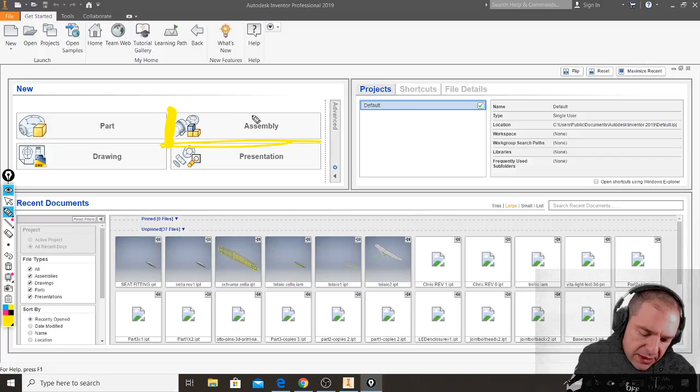So what we have to do here is this: today we need to start talking about assemblies. There's this part of Inventor. Sorry if sometimes it looks like I'm stuck - that's because down here I have my phone with the screen showing your chat, so when I look down, it's because I'm reading your messages. I'm not falling asleep. So what I was saying is this: today we need to talk about assemblies and what it means.

Assembly is very simple. When we need to create a design object that is made by mounting together different pieces, in Inventor, to make a realistic simulation, instead of making the object as one single block, one single part, we need to really create all the different pieces, and make each a different piece that at the end is combined into a final object.

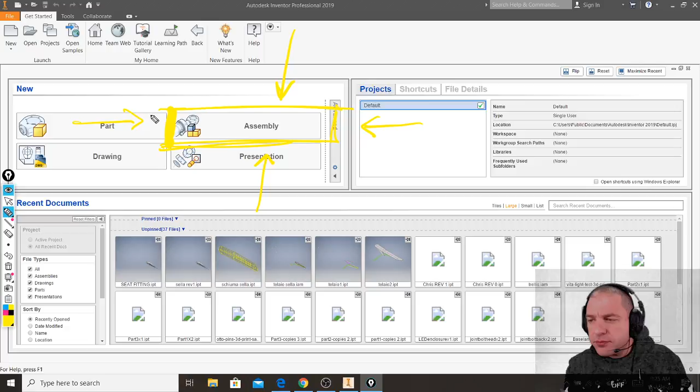In order to make a to-do list - let me see, I have this software here, this board... let's delete this, make a new one. Perfect. This is our to-do list: we need today to make three, I'll say, small Inventor parts.

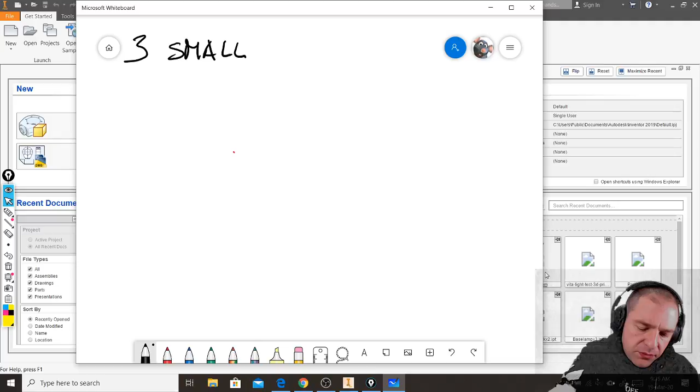An assembly is basically a container where we can put our parts inside, and then we can check if these parts are matching each other. So we need to start understanding how our parts have to work together and what relationship they have.

Just to let you understand which files I'm going to create, I will make a very simple sketch so we can understand what we are going to see in Inventor. I will make three very simple parts at the beginning. Let me make just one starting simple box.

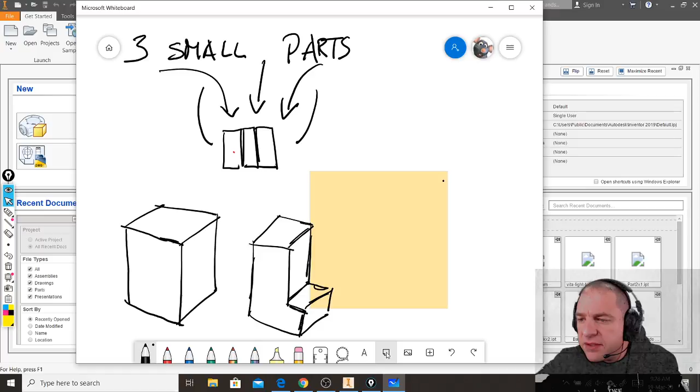Then I will make something that is slightly more complex, that will be this object here. And last but not least—let me delete that yellow thing, don't ask me why it's there—then I will make a third small block. Let me see if I can make a new one. Let's delete this.

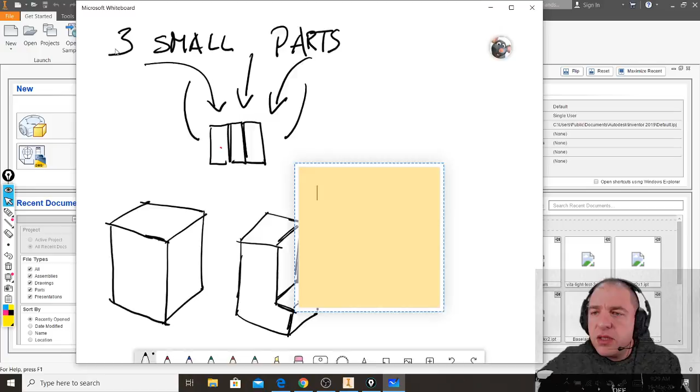Okay, so I was saying this: we will make one box to start, then we will make an L-shaped object like this, and then I will make a smaller box.

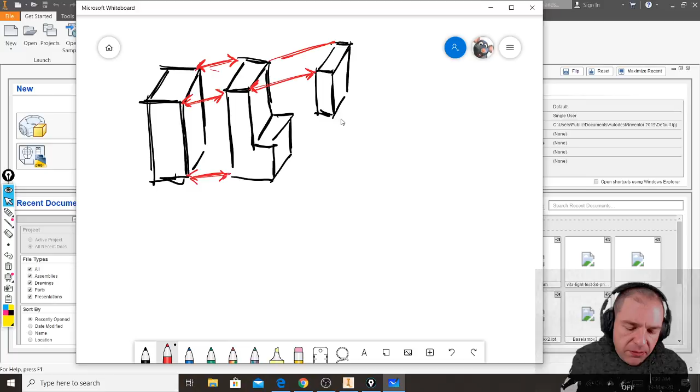This is why: simply because the final result I want to obtain must be something where these parts will be snapped together, and the relationship with my last object is that it must precisely be snapped here. So at the end I will have my object number 1 perfectly attached to my object number 2, perfectly attached to my object number 3. This is how my final Inventor assembly should look.

In order to make this happen, I need to create this, this, and this object as different Inventor files. I will basically have to create 3 parts that I will simply call part number 1, part number 2, and part number 3. I will save these as 3 independent files.

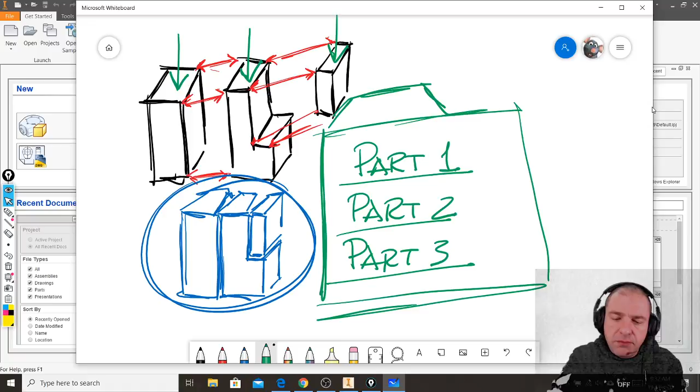Also, especially if you are starting Inventor and have never used it before, when you start making different projects it will be a lot better to create independent folders for each project. So I will make a folder, let's call it School folder. Inside this School folder I will find all these parts. When I make another project, I will make another folder and separate the parts into independent folders. Later on I will explain why this is so important.

But first thing first, let's start by creating our parts in Inventor. So I start by clicking New Part, and as I said at the beginning, this will be that part that is just a regular but slightly big box.

I need from now to start using Inventor with a bit more precision, by knowing dimensions, by adding parameters, not just by drawing free things without dimensioning. So let's start by making the first box. I make, for example, from the top, that is XZ, a new sketch, and I start by drawing a rectangle.

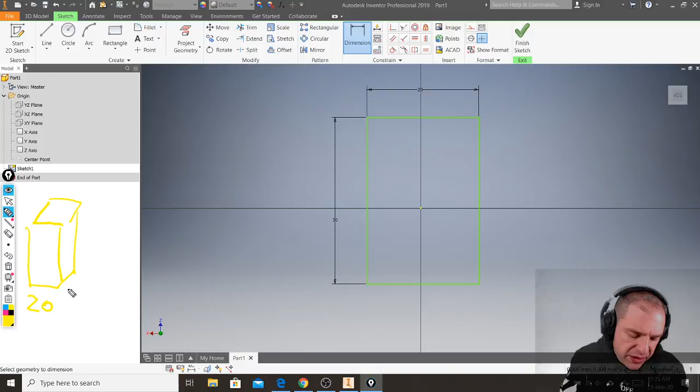Once I make my rectangle, I will start adding precise dimensions. This is extremely important because when I make parts I need to have an idea of what I'm doing, so I need to write a few notes and remember dimensions so my pieces will be matching parts. Let's say I add my first dimension to the rectangle, from here to here, then click there. Let's start with simple numbers we can remember: this will be 20 millimeters. Then I add a second dimension: let's say 30 millimeters. So my first box is this one, 20 millimeters by 30 millimeters.

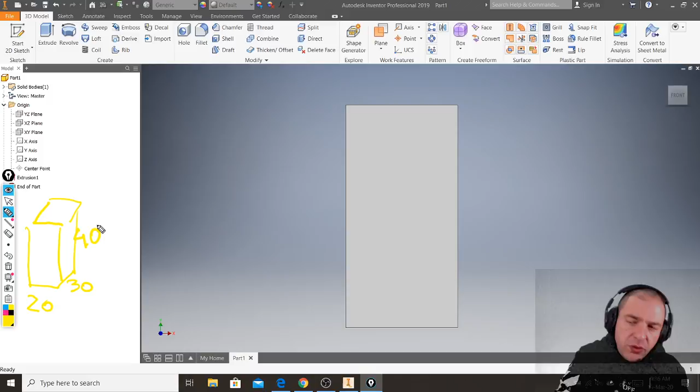Then I click Finish Sketch. With this sketch I will use Extrude to make it three-dimensional, and using simple numbers I will use as a height 40. So my first box will be 20 by 30, and the height will be 40—pretty easy to remember.

Till here, nothing new, but let's start viewing how to save this file so it will be easier to reuse. I click Save—but when I click Save, Inventor always uses the latest folder I've used to save my file. What I will do instead is go to the desktop and click this symbol here to make a new folder.

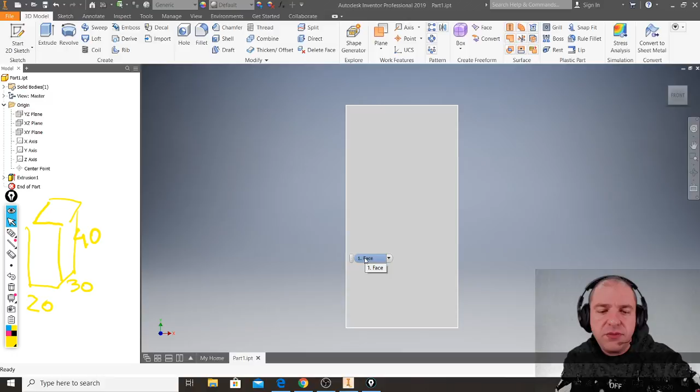Once I've done this, I will call this new folder School, as I said. I'll double click inside—oops, screen is gone, it's back, don't worry. As I was saying, I save this as Part 1, just to remember this is my first file, and this is number 1. And I get this.

Okay. Once I've made these, I will close part number 1 and make a new part. I'm using these pieces of paper simply because I don't have a whiteboard, but I'm sketching this simple diagram so I remember easily which dimensions to use for my next part.

My next part must be the L-shaped element that I mentioned. I'll start this time, since it's easier to make, by drawing the L shape that I will extrude. And you'll see something I do on purpose: instead of drawing the L directly on a vertical plane, which might look more logical, I'll draw all my parts starting from the top plane, just to show you how interesting the assembly process is in Inventor.

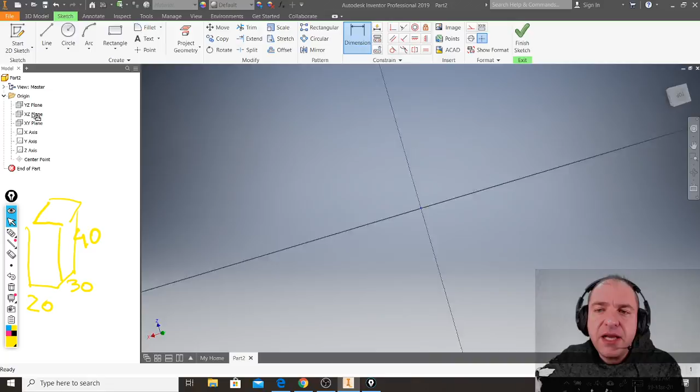So again, I select the top plane and draw an L-shaped object. I start without any dimensions at first. When I draw, I try to pay attention and make my lines straight, so when I see the perpendicular and parallel symbols, that means I'm fine.

Then I will start adding dimensions. This distance, between the top and lower edge, must match the height of my part number 1. So this will be 40.

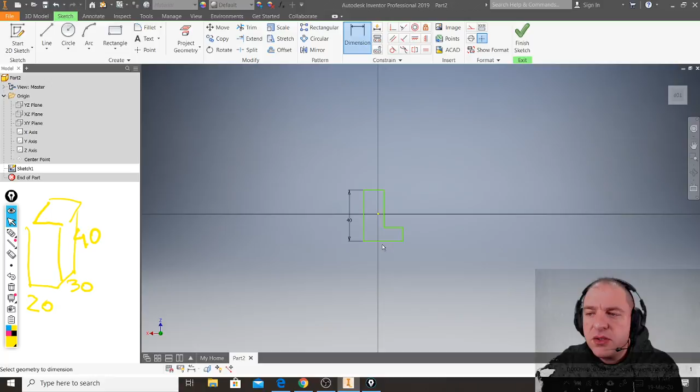All other dimensions can be whatever. I'll use simple numbers to avoid dealing with complex values. So I'll make this 20, and this distance 20 as well. I need to fix this distance - let's say 10. And then I need this one... exactly. No, that's not needed because I already have this.

So this is fine, and what I'll do is write these dimensions here just to remember. I change the color and start by drawing this L shape: this is 40, down here is 30, this is 20, this is 10, this is 20 - so this will be 20. And we have our phenomenal sketch.

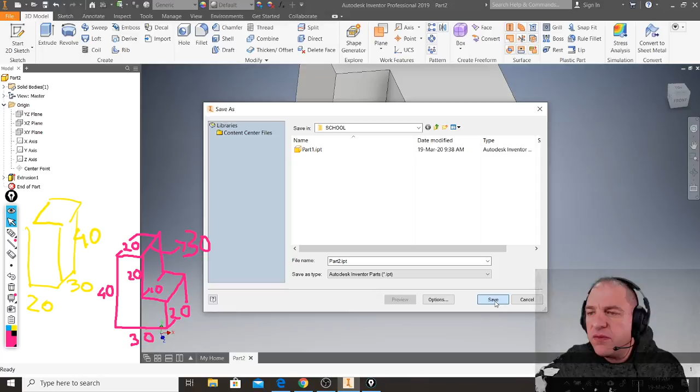I've almost done. I need to make my third part. I'll just remind you that I have to make a smaller box that has to fit this gap. So this box must be 10 by 30 as depth, and 20 as height. I close this and make a new part.

I will start from the top, sorry. Again, I start by making a simple sketch. So I make a rectangle, and I'll give this rectangle 10 and 30 as dimensions, and then extrude it 20 millimeters up.

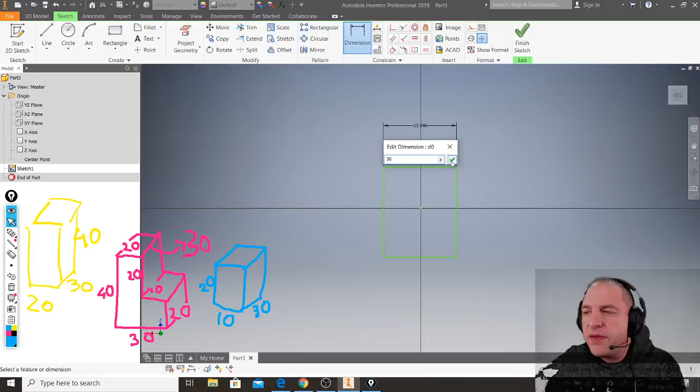So I will give this dimension, and look, I'm doing something slightly wrong on purpose, but still using correct dimensions. I make this 30, then I make this dimension 10, so that in floor plan it matches the dimensions I need. Then I extrude it 20 millimeters.

And this is my last phenomenal piece. I click Save, and I will call it Part 3.

Then, as your project becomes a lot more complex, it will be a lot better to give your files more precise names, like with the functions they have, the orientation - left, right, top, bottom, cover, lid, handle. You should give your files names that you can easily and highly recognize.

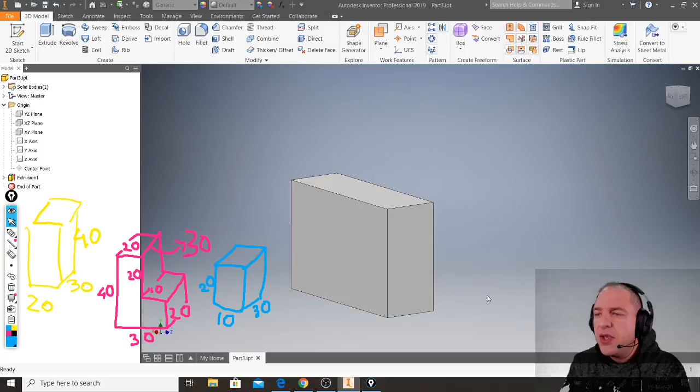So let's close our last file, and let's also delete these sketches that were useful just to understand the dimensions we have to maintain along the process of making our parts. Now we are ready to create our first assembly. And how do we do this?

What we have to do is, I know this will be a little bit shocking, but if we want to create an assembly, we need to make an assembly. Believable. And what is phenomenal here is that now you have just an empty object. You can also see that most of my tools are turned off because right now there is nothing to do.

Simply because when we create an assembly, we need to start by going in this area, and take care, we don't have to immediately click this big button. Don't do it. What we have to do instead is click down here where it says place from the content center, but most important here we can see there is a small triangle, meaning there is another tool we have to use. So I will click down here, and I will use the tool that is simply called Place.

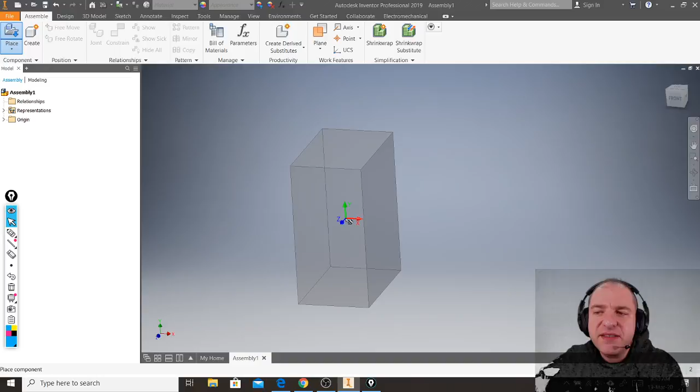And this is exactly what I'm going to do. So I browse the folder called school, where I see these three parts, and I will start by clicking part 1, and I click open. This will be at the beginning a semi-transparent preview, so I just left click and I have placed my first part.

What you see also is that Inventor is giving me the possibility to continue placing part 1, but we will see this later on when we make examples with more parts, so I will show you another interesting example. For now, once we have clicked to place our part 1, we press escape from the keyboard, and we simply repeat the process of placing.

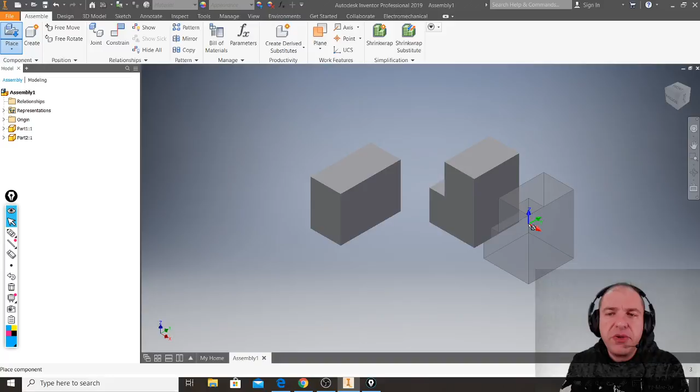As I said before, you can notice that our main button will remain with the option that is place, so we can just click it. We will select part number 2, click open, and place our part inside this area without any precision, without any snap. We just left click it. And that's it, we have nothing else to do. We need one repetition of part number 2 and we press escape.

Last but not least, we repeat this process for part number 3. Select the part, click open, place it, and we just need one repetition of this. We can press escape and we are good to go.

So what we have now, if you see, we have our 3 elements that should be attached together, but basically this is like having 3 construction blocks laid on the table. What we have to do now is like having instructions to follow, and we must combine these pieces together. So what we have to do, as we have sketched, let's see if the sketch is still there. It should be here, exactly. Our sketch must be like this. So this is our final result.

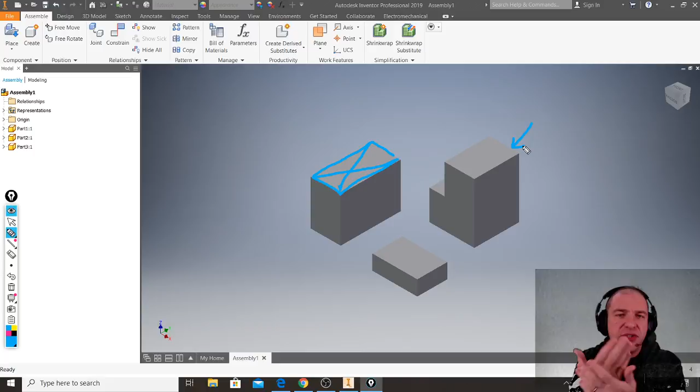So let's understand this. Technically, this face, this one, and this face, the one on this side, they need to perfectly match. They need to be aligned.

Then we need to make other adjustments. So when our piece will be mounted, this top face should instead be aligned with this top face. And last but not least, this face of this object must match that face of my part number one.

So these are rules that I need to check if they work, and if they work, my pieces will perfectly snap together. But how can I check if this is true, and how can I apply constraint rules to my parts made in Inventor? This is exactly what you have to do in the assembly. And in the assembly, this tool here, which I will highlight even more, called Constraint, is the one that allows you to start creating matches between all of your single parts. This is what we are going to do now, immediately. That is this.

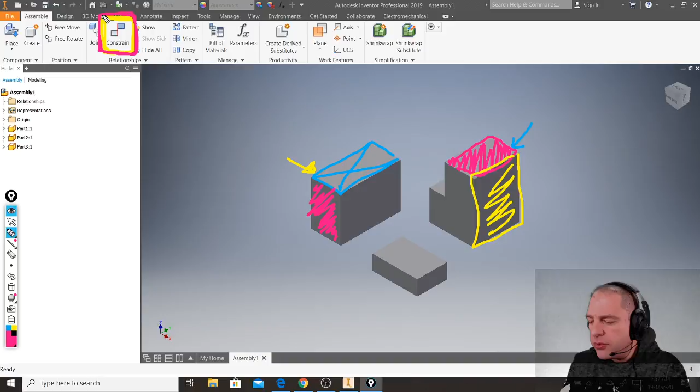Look, I click Constraint, and this is the dialog box that appears when I click Constraint. What I have to see is that into Constraint I have, first of all, slightly different ways to create relationships between different parts.

The one that we will use the most will be this method here that is called mate, and this basically allows us to align planes together. And when we use mate in combination with these, we have these two options. We will explore them in a second.

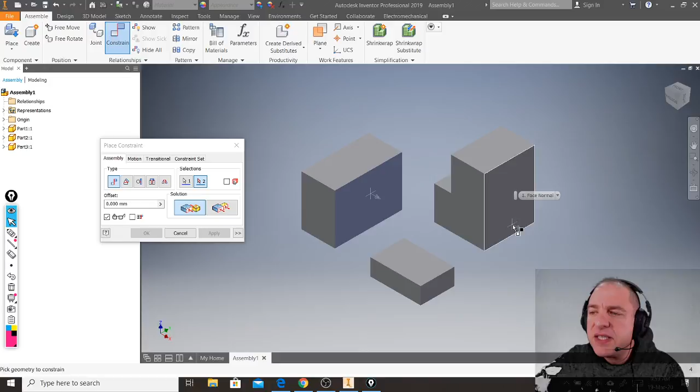How constraint works, because this is very interesting, is basically we click constraint, then we click one starting plane or face of your object. Once we have clicked the first face, we move our mouse and click the second face that is on the opposite, on another object. But we click here, and what Inventor does will be it will match these faces together. So look, if I click my second face here, this is what happens. Poof!

And if you have speakers turned on, when you make these, you also hear a sound like poof. Okay? If we are happy with the result, we click OK.

Let's see what we have created in Inventor, because this will start by being unbelievable. Look, if we try by selecting an object, let's say this box here, and we left click and drag, we can see that we are free to move this box wherever we want. This box has no constraint.

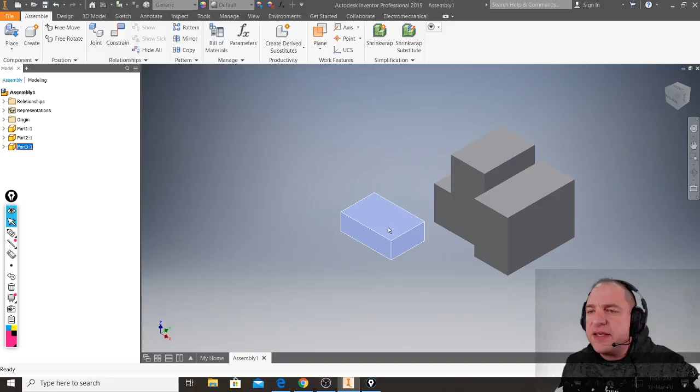We haven't yet matched this box with any of our parts, so if I move it, it goes wherever we want. But now check this instead. We have created our first relationship. We have said to Inventor that this face of this box must match this face of this L-shaped object. So now, if I left click and select this box, it looks like I can move it wherever I want, and I can do the same here.

But it is not 100% free movement, because if you rotate your point of view, you will see that no matter where I try to move these pieces, my planes are always matching, because I have created one matching constraint.

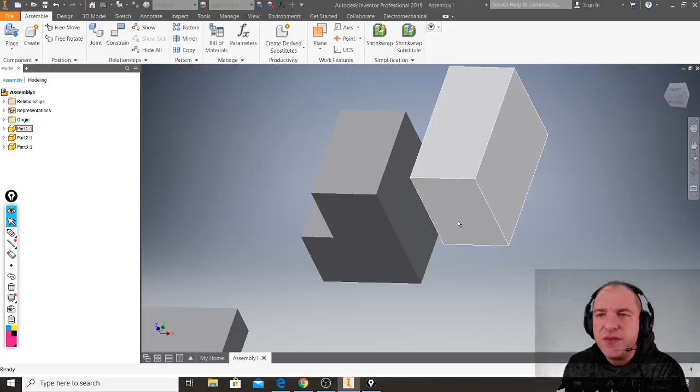What I need to do now is match the top face of this L-shaped object with the top face, that should be this one now looking forward, of this box. So where is the difference, and why? I showed you before that we need to understand these 2 options here, this one and this one.

Simply because when I made the connection between these 2 faces, look, one face was looking like that, second face was looking like this, so they were opposite facing faces. And if I want to match opposite facing faces, I need to use this option here.

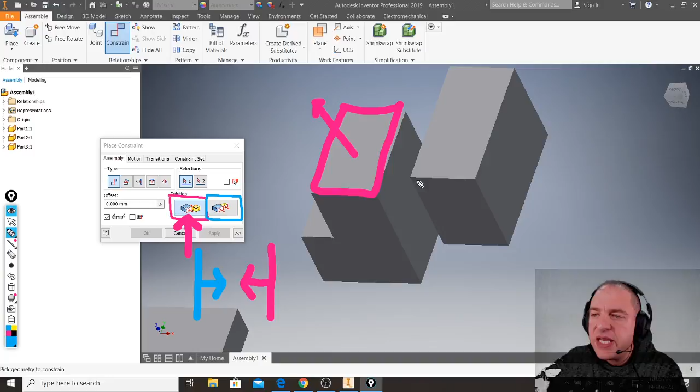Now, because I want instead this face that is facing up and this face that is oriented forward, I want both faces to be matching, but I want them to remain like that - both looking at the same direction. So in this case, I have not to use this option here, that is called mate, but the one that is called flush. So I need both faces to have the same level.

So I will first click flush. Now I can click this face and this face. I left click. Boom! And now they are perfectly matching, looking at the same exact direction. And I can click OK.

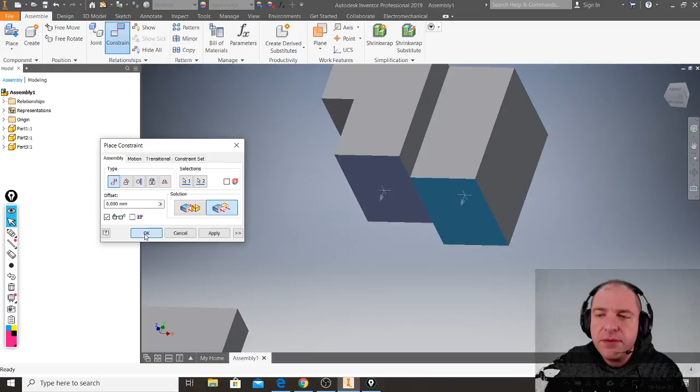And if you check, now if you try to move one of these objects, this is what happens. Look, I can slide this box only along this direction, as well as this L-shaped object. But if I try to drag these objects left or right, because they are sticked together with constraints that I have created before, now one object drags the other one.

Okay? You can still see that I have one last degree of freedom. That is, these objects can simply slide up and down.

And I will fix these, so I will check if everything works properly by creating a third and last constraint in between these two elements.

And what I will do will be simply: I select constraint. Take care, I want this top face and this top face to be oriented on the same direction, so they must be flush, not opposite. So I click first that I want the relationship to be flush, and I click this second option here. Then I click first and second plane.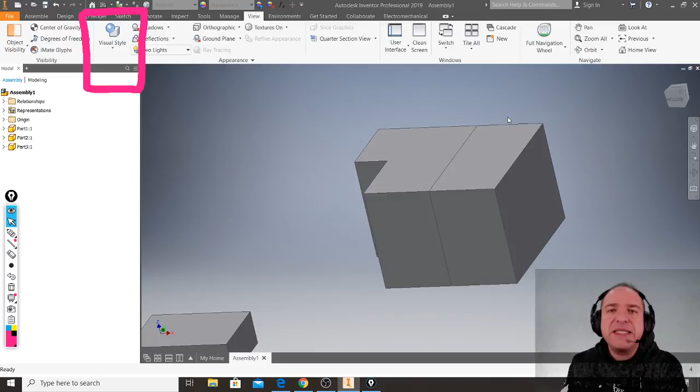This is not only because I suggest, but simply because when we create relationships, so if I go back to Assemble and I go to Constraint, we will see the more we make complex parts that we are not limited in creating matching relationships between planes, but we can create also relationships between edges, circles, certain loops, and so on and so on. So understanding better how your geometry is created will help you also in creating your final assembly.

But now, just to repeat another time these concepts, now we need to check if our last block will match this space in here. So I have to make other 3 constraints.

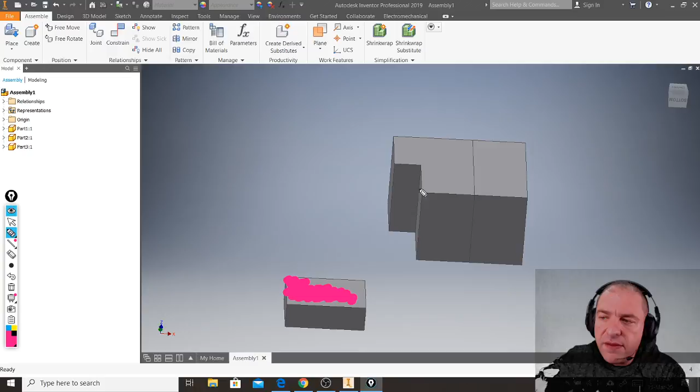So I will start by understanding this. I want this face and this face. This face is looking like this. This face is oriented like that. So I don't want them to be flush. I want them to be mate. So I want them to match.

So I have to click Constraint. Mate is always selected by default as a matching option, so I'm sure that is there. I click this, I click that, boom! And first object that I click is the one that is moved. Second click that I do is where my first object goes. So I can click OK, and now I can try.

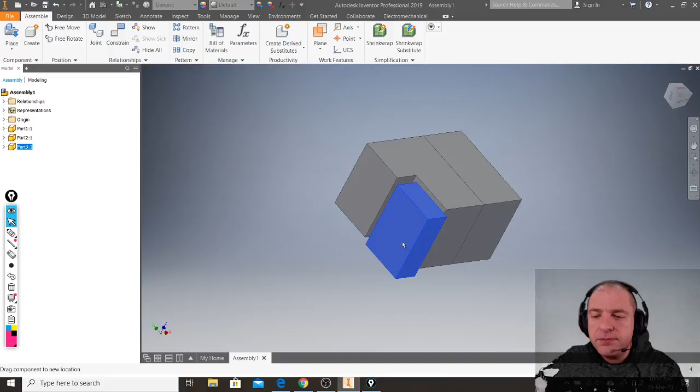And each time that you make a constraint, you can try this. That is, you can try now to move your object, and you can see that you are still able to move it back and forth, up and down. But if you rotate your point of view, you will see that even if it looks like this plane, this plane is perfectly matching.

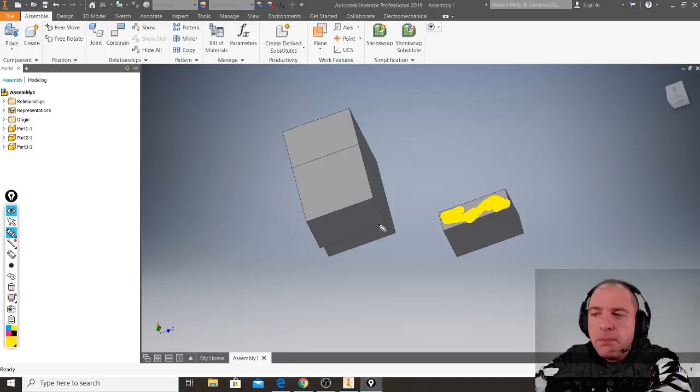And now we have just to add more connections, more constraints. So we need to make 3 of them. So for example, I can say that this face, this one, must match the one that is here. So I can click Constraint.

I will click Mate, and I select. I want to move this little box, so first that I click is the face on the box. Second, I click the face on my L-shaped solid. Boom! And I click OK. And now my box is there.

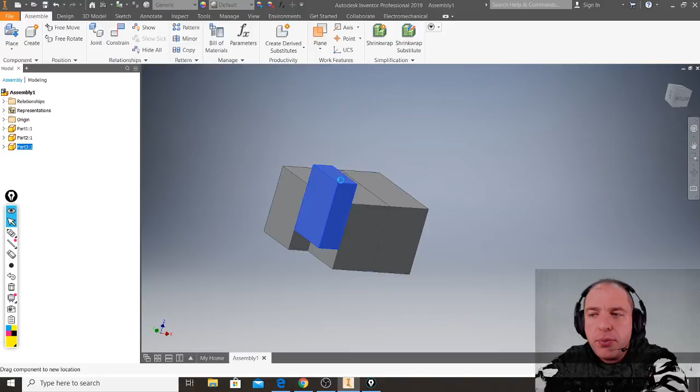The only movement it can do, if you try, is left click and drag it, and you'll see that this thing can only slide up and down. I can't move it left, back, or forth. No, because if I shift these, now that I have created constraints, they are stuck together and working perfectly as one element. But I can still move it up and down.

I have to make my last operation. So I click Constraint. This time I want this face and this face to be flush, so they line up together. What I do is first click that I want a flush constraint, then the first object I click is the one that moves, so I click this, then I click that. Boom! I can click OK. Now I can see that starting from 3 different parts, I was able to create a final assembly.

Okay? Does it work? Let's see, let's see your messages. Perfect. Okay.

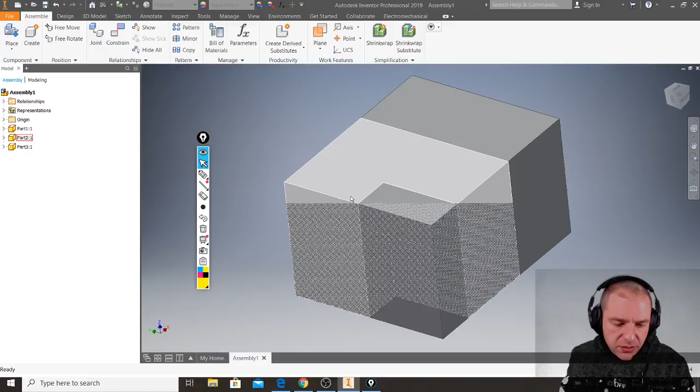First of all, let me see if I can, if the screen goes black for a second, don't freak out, okay? I just need to see if I can have my pen working again. Let me see. Because, no, where is the pen? Give me 3 seconds, I just need to see this. No, the pen doesn't work because I wanted to make better sketches.

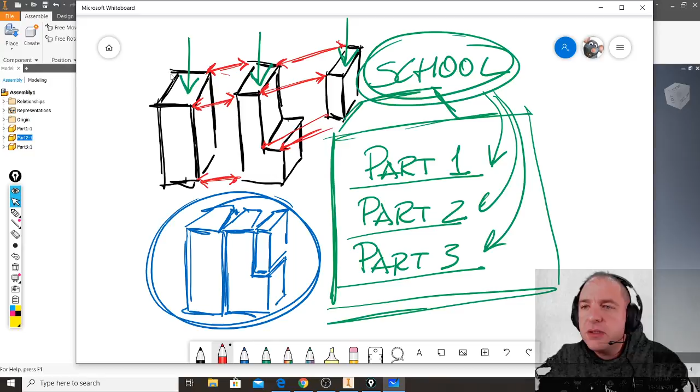As I said, don't freak out if the screen goes black. No, it's okay, it doesn't matter. Let's prepare the sketch for the hinge. I'm so sorry, I don't know why the pen stopped working. But basically, what we need to do, and this will be an interesting process because I will show you not only how to make a hinge, but also something more that's inside the assembly property.

So what I need to make the hinge is this piece. Look, yes, this one. Why is it not drawing? Hmm. No, but everything is against me today. So let's draw it here. Look, I need one piece that will be like that, and that will have a hole.

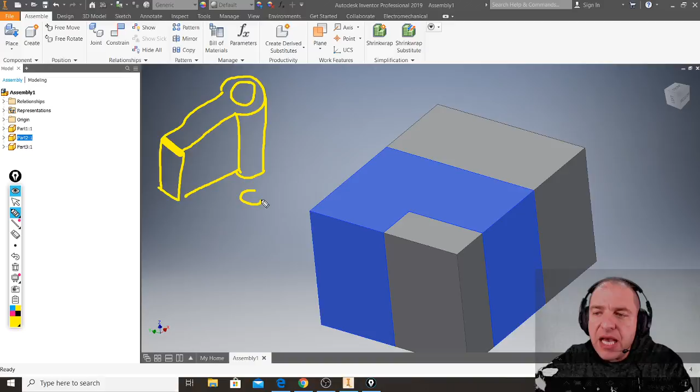Then what I need is I will place a cylinder that also has a stop here and then continues like that, so that these will be the axes of my hinge. But in order to make it more realistic, I will need another piece down here, of course with the same radius. I'm just sketching them in a very poor way, so that these will be the hinges. These two pieces will be able to rotate around that center part, so the hinge will perfectly work.

But why do I want to make the hinge like this? Basically because in my sketch you'll notice that this part and this part are exactly the same. This is not secondary, because when I make an assembly, if I have an object made of 10 pieces, but 8 of these pieces are exactly the same, I don't have to make one file for each part. Instead I can just make one element and put that same exact element inside my assembly as many times as I need. So let's create these two parts, because I need to create only this element and this element here. So I need part number 1 and part number 2. Look.

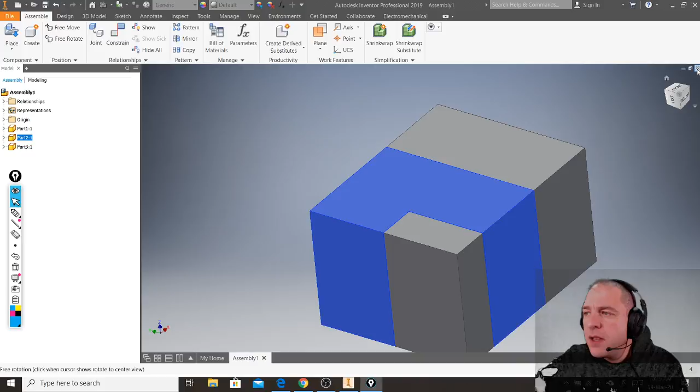So let's close my assembly, for now yes, for now yes. Let's create those two parts. And again, because we are here to learn, you'll see that I will probably make one mistake on purpose, and later you'll see which one. So let's start by making, not the cylinder part, let's start with the second part. Actually, first, sorry, let me just make this. Look, I make a rectangle, I make a circle in here.

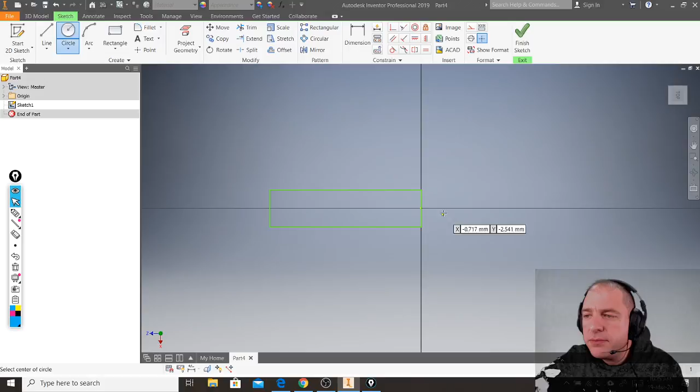Then I start giving a few dimensions. I make these 10 millimeters. I make these 40 millimeters. I make this circle diameter 30 millimeters.

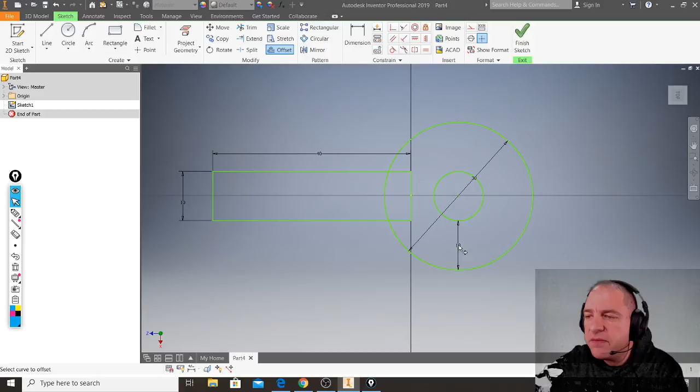Perfect. Then we need to create the hole inside, so I make an offset, and I make this offset 10. Let's keep it 10, it's okay.

We have almost done. This now is a shape that can't be extruded at all because it has these intersections. So what I have to do first is click trim and trim these unnecessary parts. Then I can finish the sketch.

By making these, I can now click extrude. I will click the inside of this object and extrude it how much? 30. Fantastic. Believable. Okay? Ready for this?

What I do now is I save these. I'm using school as a folder, but if I call this part automatically part number 4, it becomes a little bit complex to understand what I'm doing with this part. So I will call these hinge top and bottom, and you will understand in a second why I've called this file hinge top and bottom.

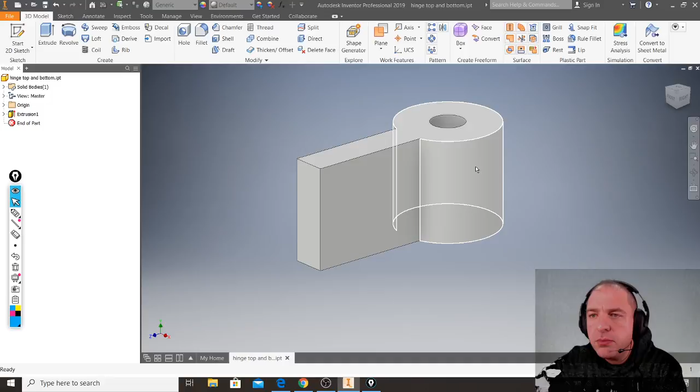So I should remember a few parameters, at least the radiuses that I was using. Let me open the sketch. So the diameter is 30 and this offset is 10, which means if I measure this radius, the radius is 5. Okay.

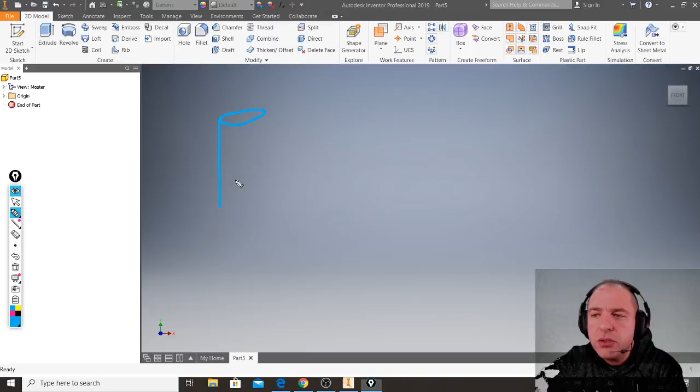And I make a new part, a cylindrical part inside my hinge. I can do it in multiple ways, because the object that I want to obtain must be something that actually works like this, where this diameter must be 30, this diameter must be 10, this height is 30 as well. This height doesn't matter, could be whatever, we will make it 5.

So if I want to make this piece, now let's make a poll. Let's see, if I want to make this object, which tool will you use? First one who answers correctly will have a D at the end of the semester. Let me see. Which tool will you use if you want to make this object?

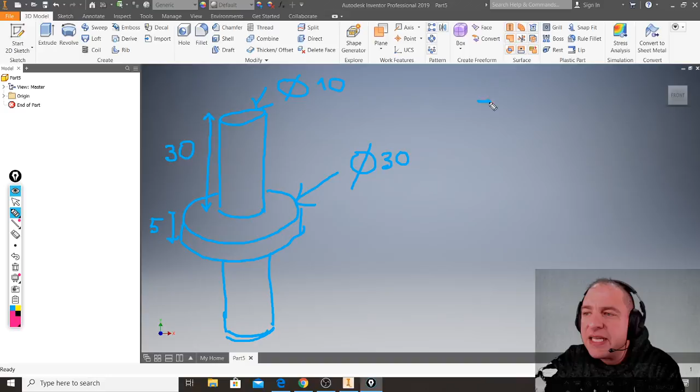We have 2 winners, my 2 lovely students. Now it's easy to say revolve, but written with capital letters, and it's correct, revolve, because I can simply, let me change the color, draw this profile, put a center line in here, and if I use revolve, this immediately becomes my solid.

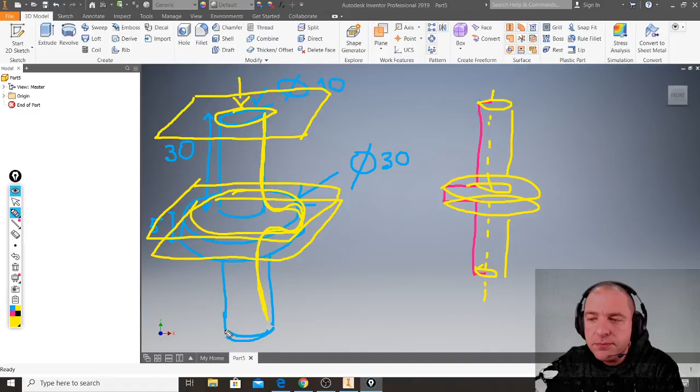If I use loft, just to answer and to see why I'm not using loft - these will be smoothed together as curves. So the result, if I make these 4 circles, will be this. Also, if I want to use loft, it will take forever because I have to make a plane here, draw 1 circle, a plane here, draw another circle, plane here, and again.

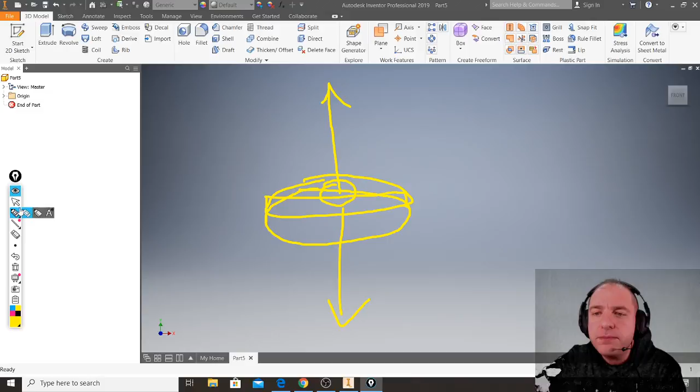As Edward said, circle and extrude. Again, why I'm not using even that? Extrude both sides - no, same kind of annoying problem, because I have to make a circle, extrude it once, then on top of these make a circle and extrude it. But this takes more steps, more sketches, which translates into, if I make 1 mistake, I can possibly make 1 or 2 mistakes more. So, right option is only revolve.

So I make a sketch, I draw this sketch, and close it. The top and bottom parts of this sketch are symmetrical, so I can use a few interesting features, like parametric dimensioning. This must be 5, and this, because the final diameter is 30, this must be 15.

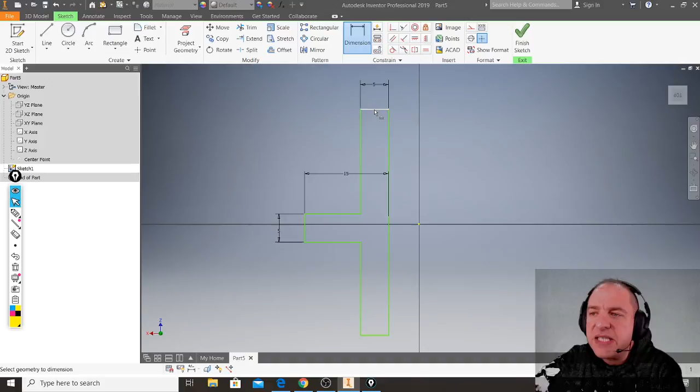Then this, we said, doesn't matter, but we just make it 5 millimeters. And last thing we need is how tall this part is, and this should be 30. I have to press escape, and this dimension, if I double click, is called D3. So if this is 30, I also want this and this to be equal to D3, so it's exactly the same up and down.

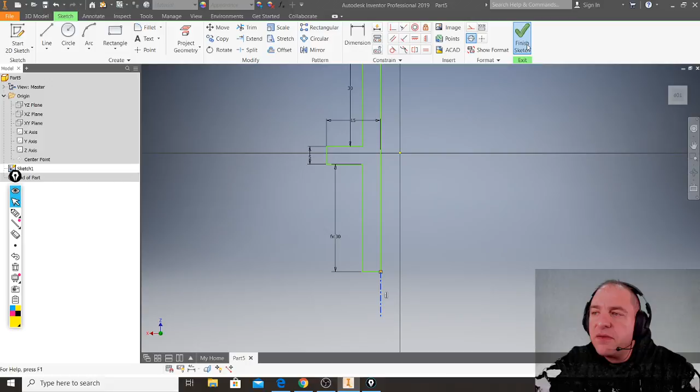I have almost done. I will simply draw this line, that for me is my revolve axis. But in order to tell Inventor that is an axis, not part of my solid, I will select it, and click this as center line. So it becomes blue because it's selected, but dash dotted, and for Inventor that means it is an axis. So I can finish the sketch, and if I click revolve, boom, immediately in one tool only, I was able to create this beautiful part.

And I will call this, save it, and call this hinge center, so that's the part that remains in the center of my hinge, of course. I save it, I can close it, so that now I can make a new assembly.

When I make my new assembly, just to check a few things, I can see this. Look, only because in this current session of using Inventor I haven't used place from content center, I can see that here I see place immediately.

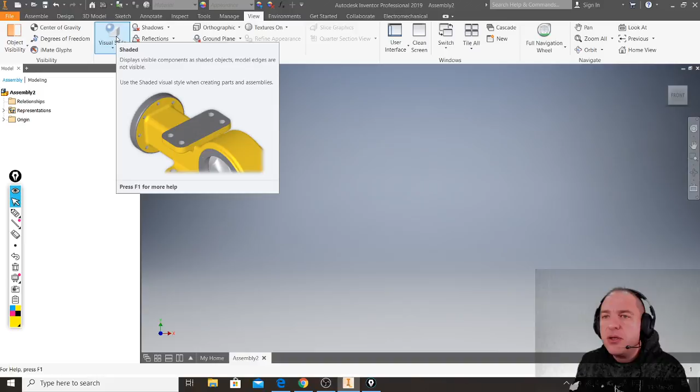If I go to view, I can see that by default, whenever I create a new assembly, my visual style starts always by being shaded. But I need, especially now because I want to see my round edges, I have to click visual style and change it to shaded with edges.

So we have almost done. I can go back to assemble, and now I can place my component, and we will see these things. I click place. I will start by using hinge center, and I will place it somewhere. And I press escape because I need only one of this thing.

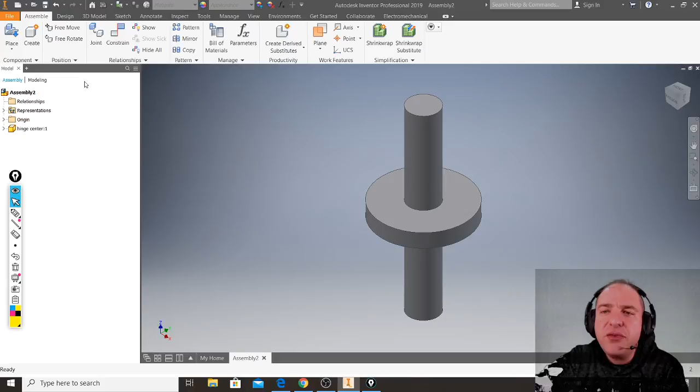Ready for this? Because this would be unbelievable. Now I need to click place, and I will use hinge top and bottom. What I will do is click open, and because I need two of them, I don't need to create two equal files, I simply need to left click once to place one hinge element.

But you can see that because place is still working, I can place another repetition of this by simply making a left click. And if I need more, I can keep left clicking and add more and more of the same exact piece. But when I have enough, I press escape. So this is a 3 piece assembly that in reality is made by 2 files.

So what you can notice is, first of all, into the assembly we have our objects displayed by their name, and next to each object there is a number. So I can see that I'm using the hinge center, but only one hinge center piece, while I'm using 1 and 2 repetitions of the piece called hinge top and bottom.

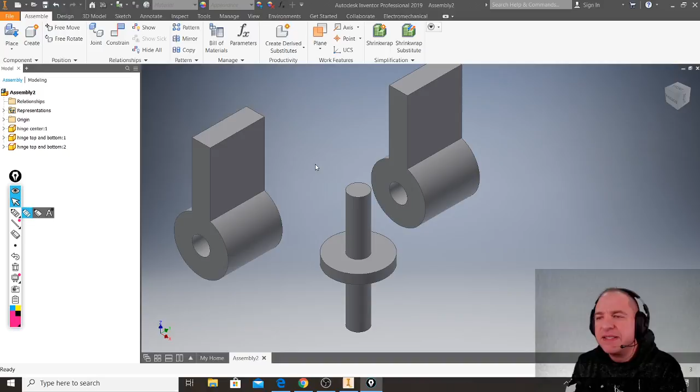So, see this now. Now we need to create constraints between these objects. What I will do is first find the right orientation, and you will see me doing something that is a little bit complex, but something you need to pay attention to. That is this.

Look at these two pieces, this one and this one. They right now have the same exact orientation. So this face here is this face here. And when I make my assemblies, I need to correctly place my objects, and you will see this in a few minutes. But why I want you to focus attention here, look.

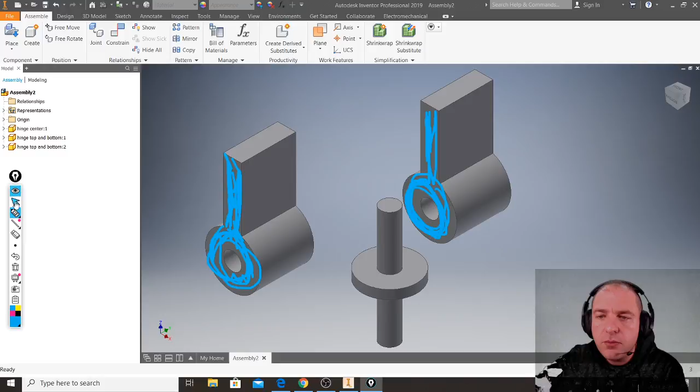First thing that I will do is click Constraint. I want the hinge piece to move, so I will click this as the first plane, and then these must slide over this plane of the center part. They must be mate because one will look down, one will look up. So my second plane will be this. Okay, and now this is more or less what I want to do, and this is working.

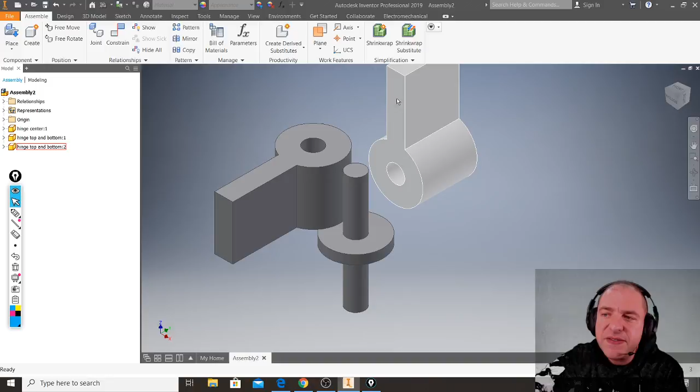Before going on, I will also repeat the process with this second piece, but this time this face that I see on my screen must match this lower face in here. So I click Constraint. I want to move the hinge, so hinge is the first object I click, and second I click the part in my center part. Boom! And I click OK.

Now I have almost done. I need simply to tell that this object and this object should have their rotation axis perfectly matching. So what I will do now is simply this.

I select Constraint. But now instead of selecting a flat face, I will select this part. So I move my mouse inside the hole of the top piece of my hinge, and you can see that when I move the mouse on something that is round, Inventor allows me to select the axis of this rotation. But take care, because I'm not moving my mouse on the edge.

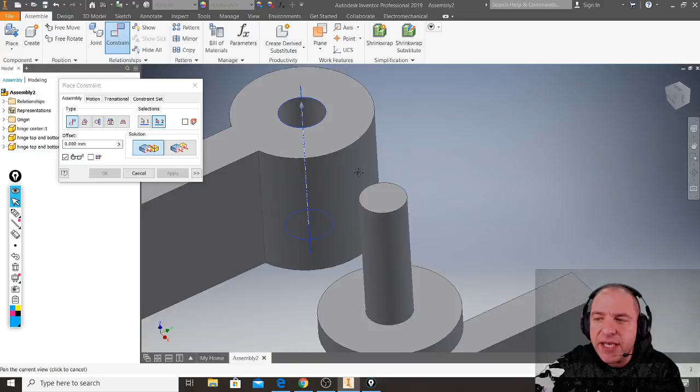I'm moving my mouse over the round face of my hinge, so I click that. After this click, I repeat the process by moving my mouse on the round face of my center part, and I left click it.

Because now I am using axes, the constraint solution is offering me completely different options: opposed, aligned, undirected. So I have to select the first one and check if it works. I click OK.

And this, as you may see, doesn't work. So it is constraining this axis, and probably I have to select the second one, aligned, and you can see that this is the one that works, simply because my arrows of the two axes were both pointing up. I can click OK.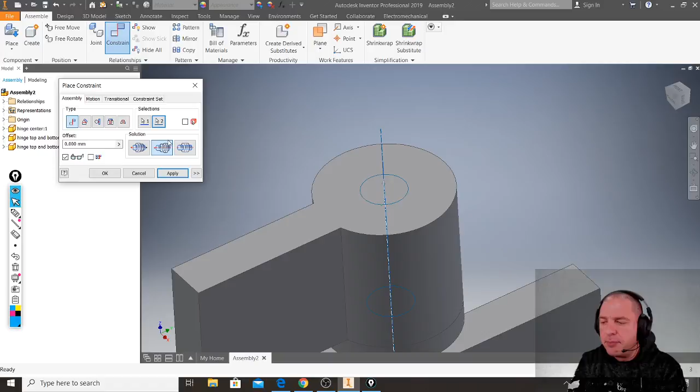So now see what I have obtained. Basically now the first and second element are not 100% constrained, because I was only able to create two constraints, the axis and a face. So this piece can't be moved, but due to the fact that it is a round object, I can still rotate it.

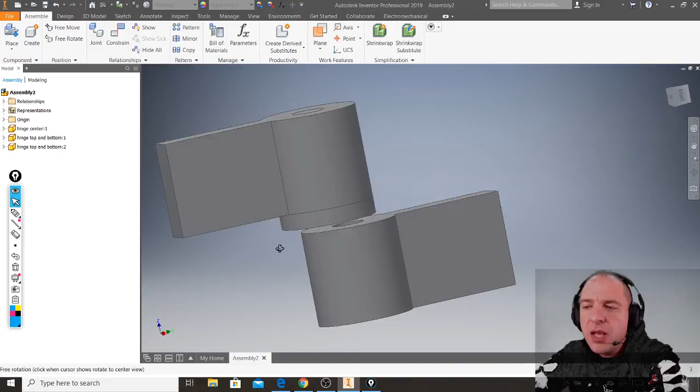I need to finish my hinge by matching the lower axis. So look, constraint. This is the object that I want to move, so I select it first. This is the one that I want to match. And you can see that this time the opposite option was working.

Because my hinge center axis was showing the arrow you can see here, pointing up. The hinge piece instead has the arrow pointing down. So unfortunately this is a matter of trial if you don't see those arrows immediately, but sometimes you have to use opposed, sometimes aligned.

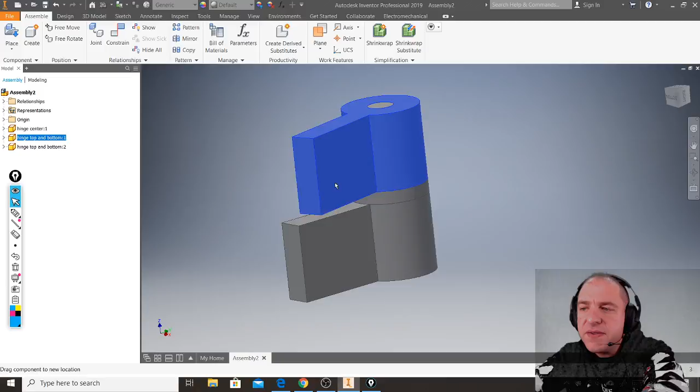Forget this. But now I have selected the right constraints, so I can see that this object can rotate, but I can't separate these pieces. They are one hinge, okay?

Till here. Because now I want to show you one more thing now that we have this hinge created.

Can you limit the rotation? Ha! Ah, technically, yes. Let me read the message. Can you limit the rotation? Technically, yes, but not today, because if not, we will go too much in depth in one specific feature. So I will show you this next week. Not next week, because then I have a big announcement. But yes, technically you can, but not today, because it would be too complex.

While I need to show you another important thing that is more important for assemblies. That is this. Look, I save my assembly. Let's say I call it Hinge.

One unbelievably important thing that you need to know is that the assembly itself is a file that simply links these parts together. This is extremely important to understand, because if you do something to your original parts and then reopen the assembly, you will see the changes immediately reflected.

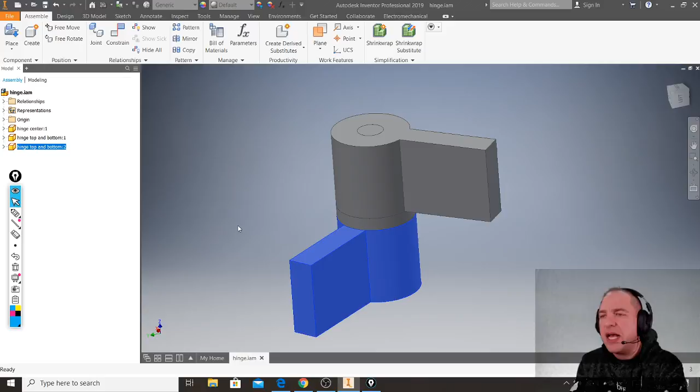What does it mean? Look, if I close the assembly and open the folder, this one, school, and I open Hinge top and bottom, I open the original part. And if I change something in this piece, like let me do just two random adjustments.

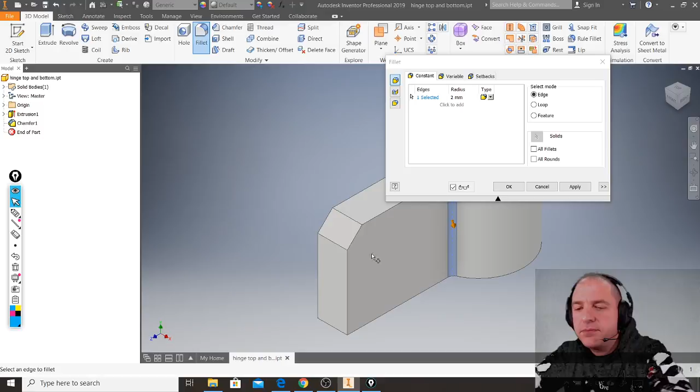Let's say I chamfer this, and I fillet this, again radius 2. So I make my part a little bit more interesting, more beautiful, and I save it.

Okay, I've just clicked save. When I reopen the assembly that I've created before, see what happens. It says my files have been changed, so you want to update, you click yes, boom, and immediately, let me also change the visual style, you will see that your hinge has the parts that have been updated and changed.

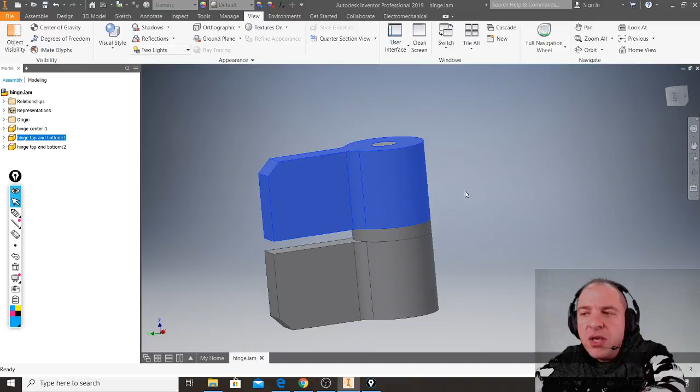So can you also understand why, when I used constraints, I haven't used the top face and stuck it to the center part, but I've used the bottom and the opposite face, so that my assembly will show a symmetric result.

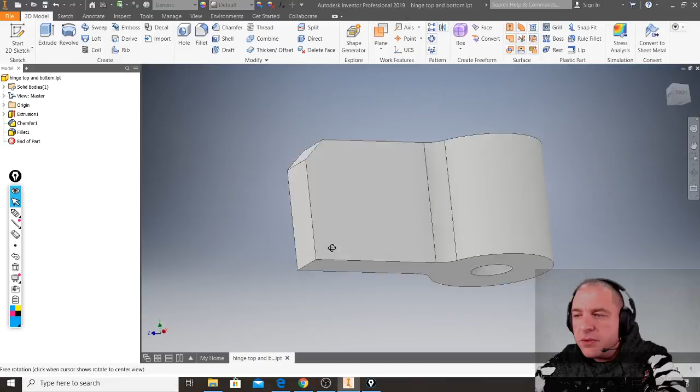So in this way, for example, I can save, yes. I can open again my hinge, and let's say here I can select this plane. I can start making a sketch from here to there, finish. And I can extrude this, it was 2.5 millimeters, so that I add this small part, and I can save it.

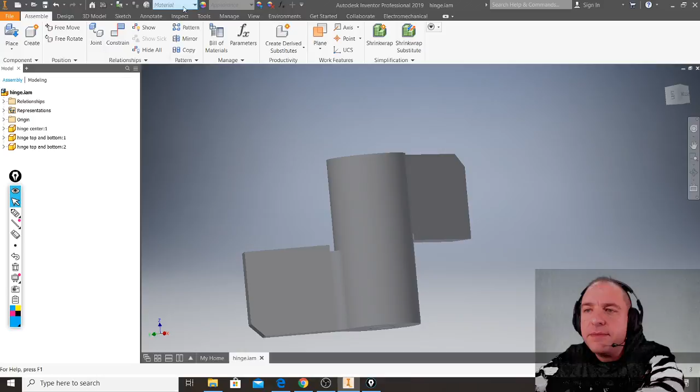Then again, I open my assembly, the Hinge. It will say that my files have been changed, so I have to update, and you will see this immediately changing in my assembly. And now this is how my Hinge looks like.

This process of creating assemblies in Inventor is extremely important because you need to understand that it can be like a work in progress. So your pieces don't have to be immediately precise from the beginning, but you can make a rough piece, make a test assembly, and then start refining your objects, working on each individual part in order to make your precise assembly at the end.

Last thing I need to tell you, that is why you need to understand that the assembly is an empty file that contains only the link to your parts, is because if you do something just to your files, not even with Inventor, but if you simply rename one of these files...

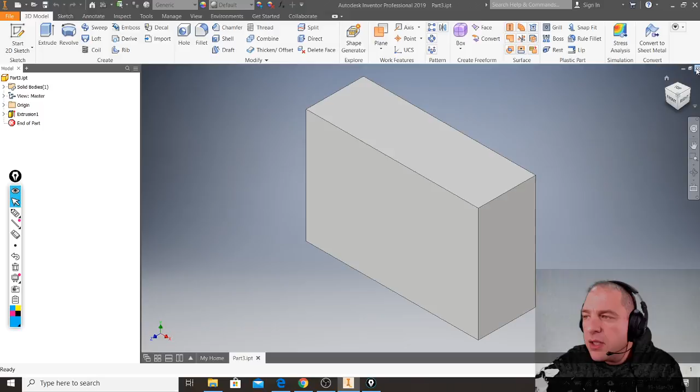So let me check the questions. Can I replace one piece with another? This is a tricky question.

Technically yes, but logically I would say no. Because what happens is if you do a trick into the files, like renaming this object part 1 and this one part 2, you're making a trick into your assembly, since you can replace parts just by changing their names. But in reality, Inventor finds that they are not the original files, because they don't have similar planes as before, and it finds they don't have the same dimensions in bytes and so on. So at first, the answer will be no.

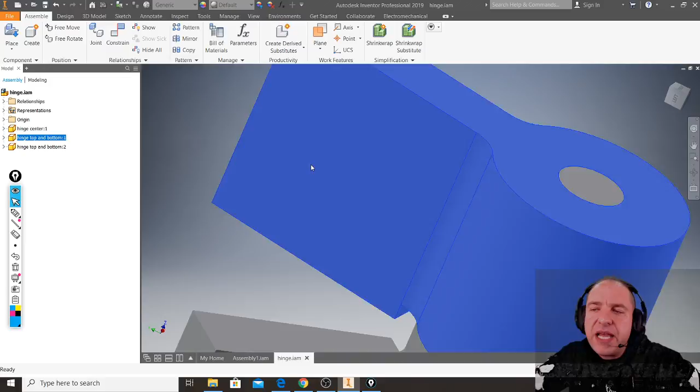So let's skip them all. Skip all. Unfortunately, what you have to do is Control Z, Control Z. Instead, you can put a piece. If you want to replace, the easier thing to do is simply select it, hit delete, and put another piece. Especially at the beginning, this would be the better way to work with different pieces.